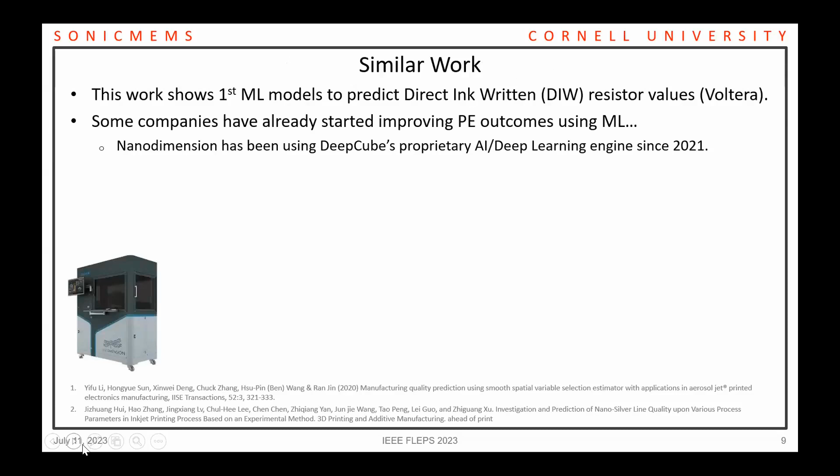In academia, there hasn't been any attempts as intense as Nanodimension's, but they are better documented because they're not proprietary. Here are a couple of the most similar works.

Li et al. trained models to predict resistances of AJP resistors using an Optomec AJP printer. Another group trained models to predict resistances from a piezo inkjet nozzle.

One of the things that makes our approach different is that we created an automated resistance probing system for quickly measuring many resistances, using a really large data set to train our ML models. Also, all of these other groups that I've read about use 2-point resistance probing, whereas we use 4-wire measuring.

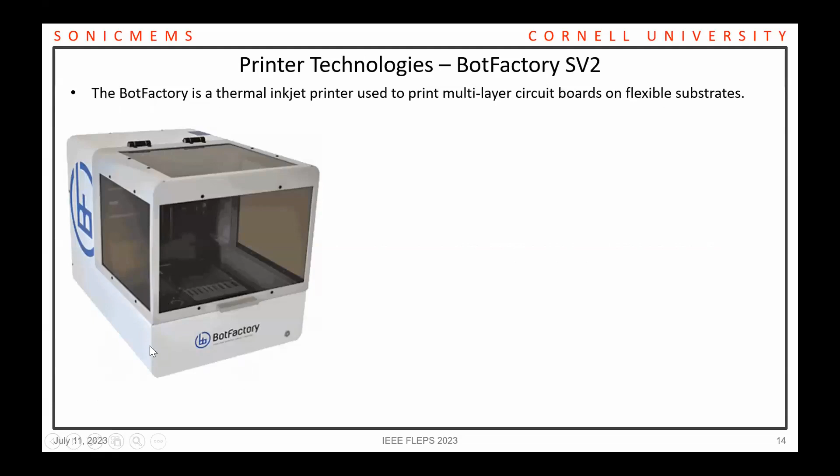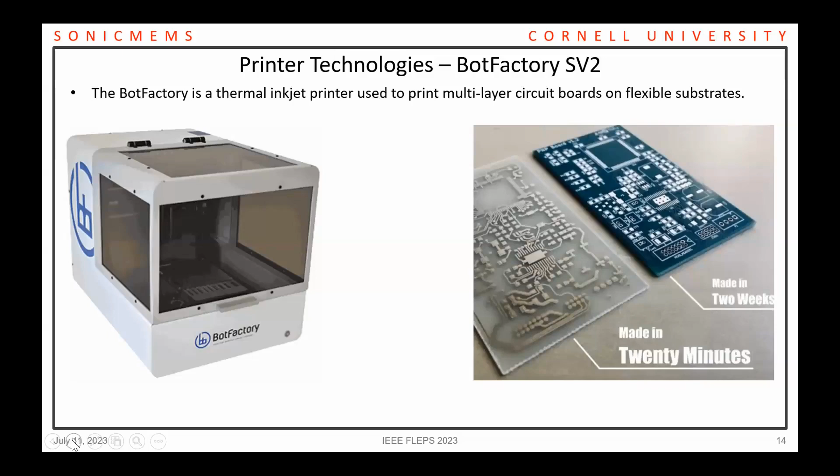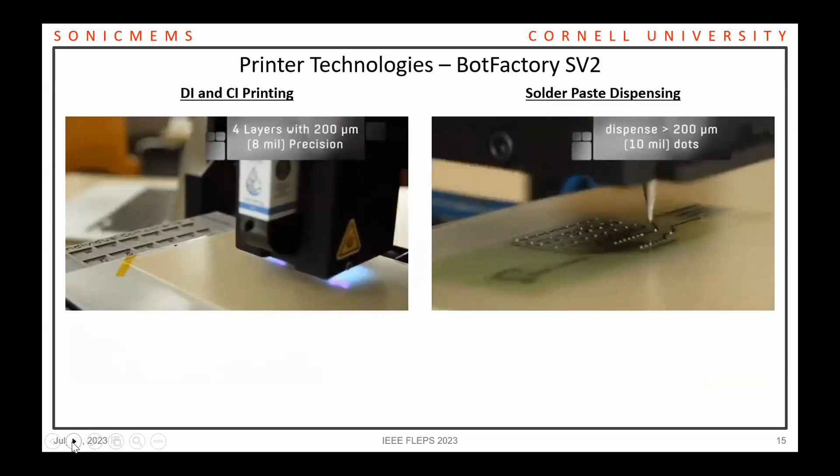So the BotFactory is right here. It allows you to print with dielectric ink and conductive ink. They used to also ship carbon-based resistive ink, but they no longer sell that. You can also dispense solder paste with the printer and pick and place components.

Although this uses a camera to detect orientation, so it's kind of finicky, and you save a lot more time just by placing them yourself. It also has solder reflow capability.

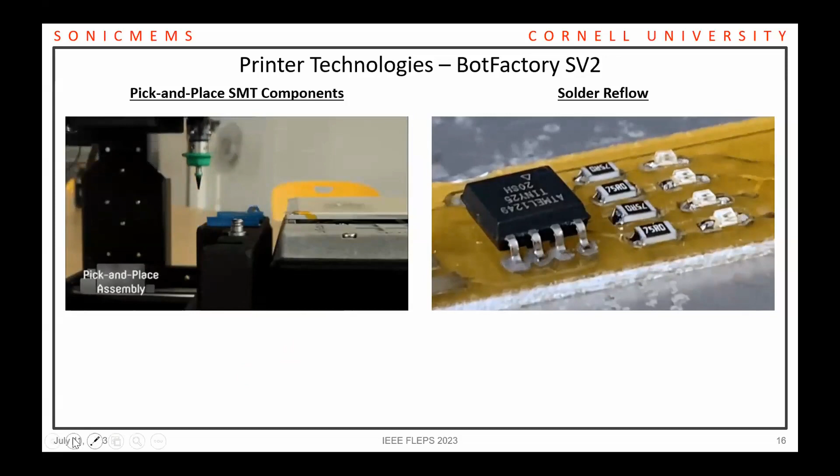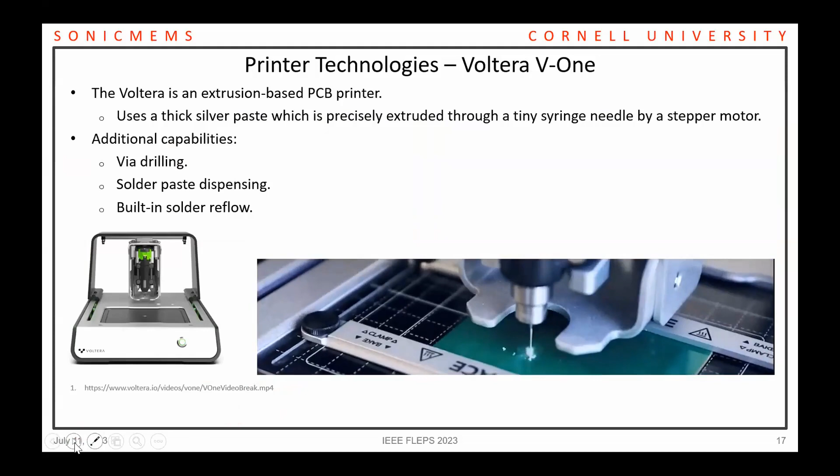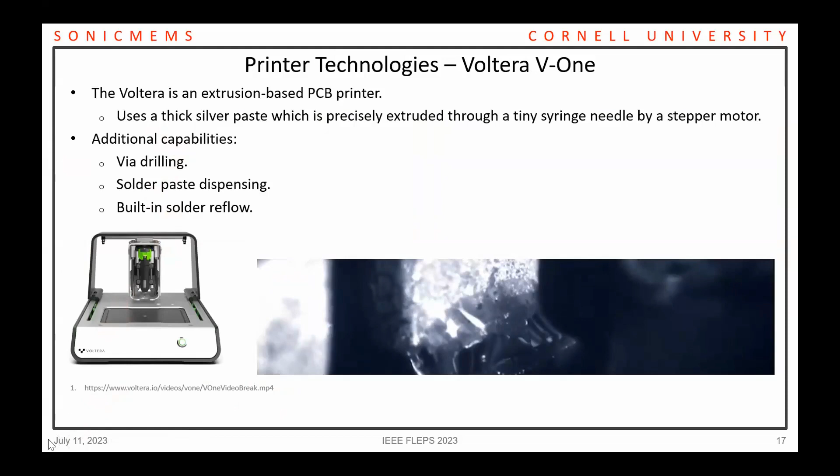For the Voltera, as I said, it's an extrusion-based printed electronics printer. Here's a little video of it doing its thing—it's kind of like a miniature icing gun for cakes. You can also dispense solder paste with it, and it has solder reflow capability. You can drill vias too, but we won't be employing any of those capabilities in this presentation.

Now I'll talk about some of the methods employed to create the printed electronics training data set.

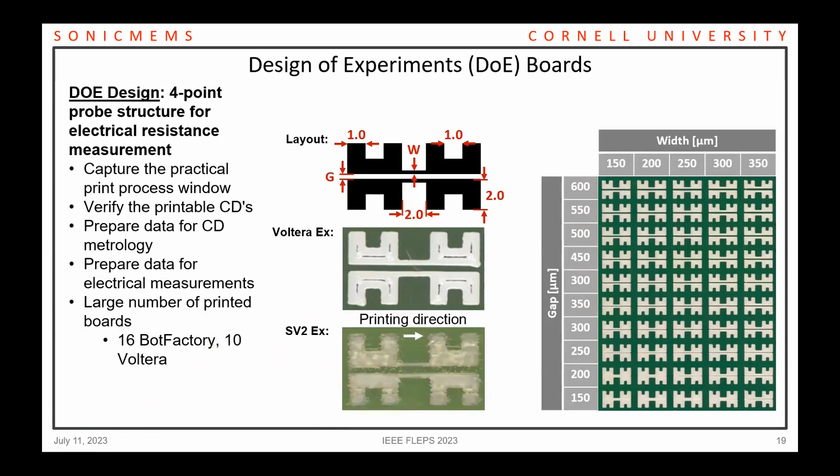So here is the DOE board. It's a 4-pad resistor. This is the Voltera version and the SP2 version. And then here's a full board with the variable gaps and widths. And here is the full assembly for the automated resistance probing station that we built.

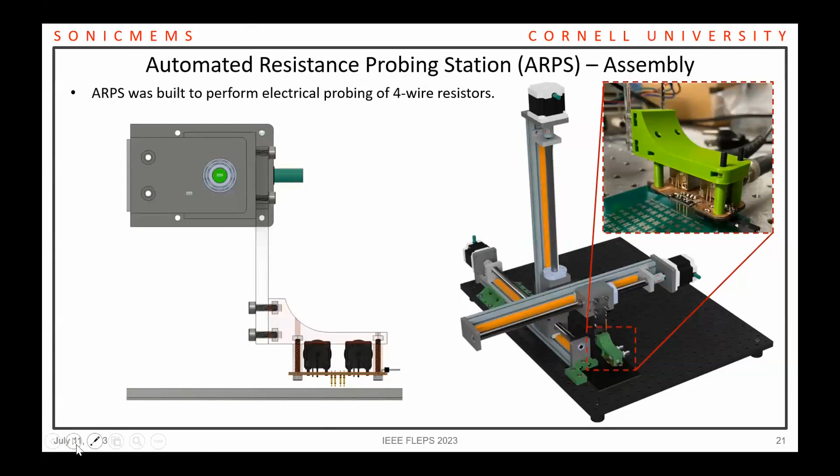We use an LPKF ProtoLaser U3 as a pulse laser cutter to etch the top and bottom of the copper FR4 board and make this modular pogo pin interchangeable PCB for doing the actual probing.

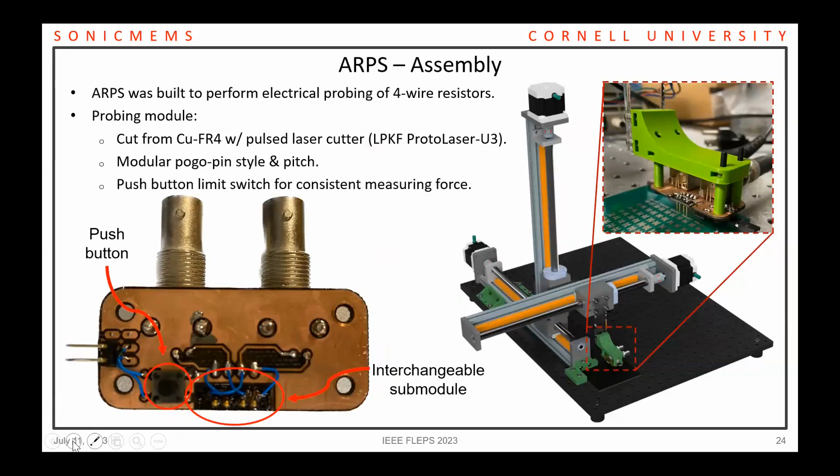And then we use a push button to actually have a repeatable contact force and detect that we hit the PCB. Here's the connection schematic. We use the Keithley 2400 SMU to actually measure the 4-point resistance values.

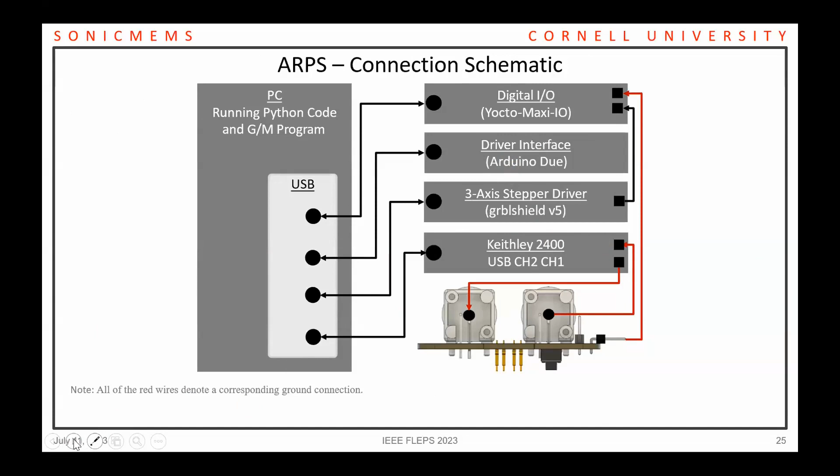So the system uses G-code. It's a synchronous setup, so basically the way that the PC, the Python code, is able to get feedback from the system is through a USB GPIO board that's taking digital input from the push button switch. And here's the Keithley, just taking resistance measurements. It takes several measurements per resistor, and then it averages them.

Here are some preliminary resistance measurements using this setup for the Voltera and the BotFactory boards. They had an average standard deviation at 50 milliamps measuring current of 16.1 microohms and 16.4 microohms respectively.

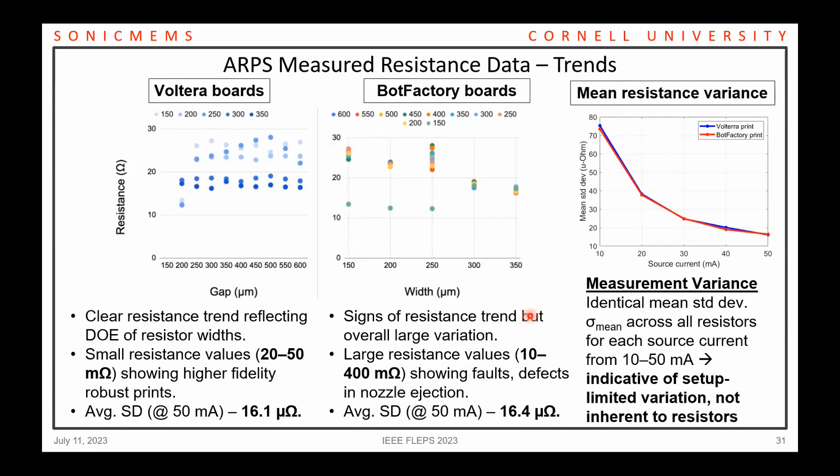And then also we found that the mean resistance variance was the same at any given current for each board, indicating that the measurement is setup limited.

And then for the visual information through our machine learning models, we use a high resolution Epson V850. We scanned at DPI 4800, which gives us a pixel size of around 5.425 micron.